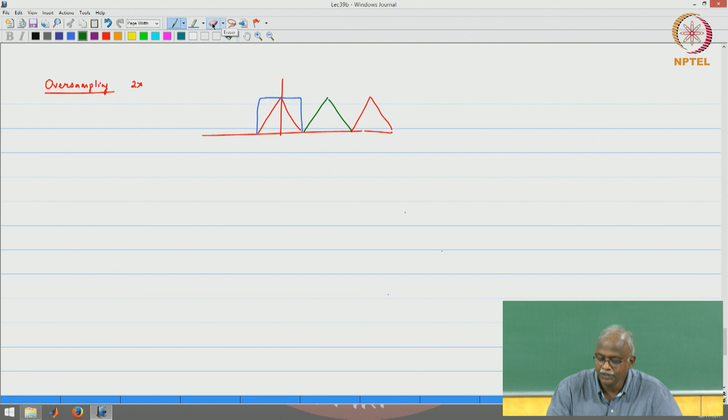But the problem is, if I do this, then my next copy of the spectrum comes right there. I do not have any room to do manipulation on the quantization noise. I am stuck with the quantization, and also with a very restrictive design of the anti-aliasing filter. Now if I say I am going to allow 2x oversampling, that means these are not in the picture. This is not there, this is not there; this is the 2x oversampling. I have now separated it out.

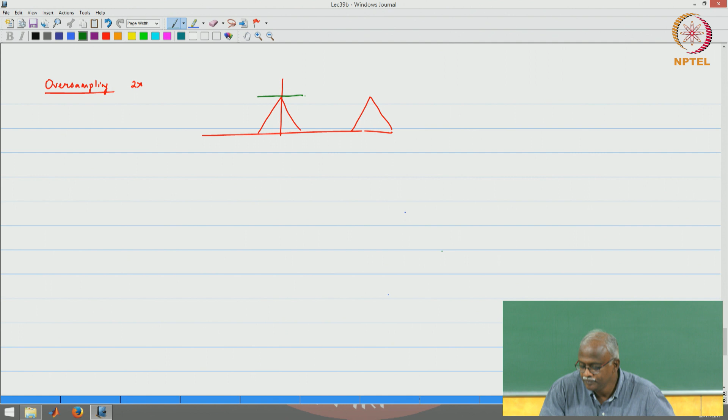So the anti-aliasing filter does not have to be as stringent as before. It could be something like the filters we have designed. You want to keep only the desired portion of the signal spectrum, so keep it flat in this portion and then have a drop off. Okay. Now what will this do for the quantization noise? Quantization noise is going to be generated across the whole range.

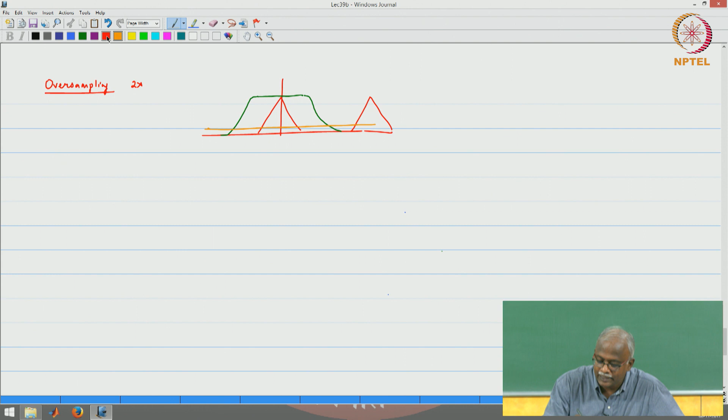So effectively what you will see is that the signal is present here, and there is some effect of quantization noise. There is quantization noise in the desired signal band, and of course outside of it also, because the anti-aliasing filter did not kill all those samples, but you will see some kind of roll off. So the noise is present even outside of the signal spectrum.

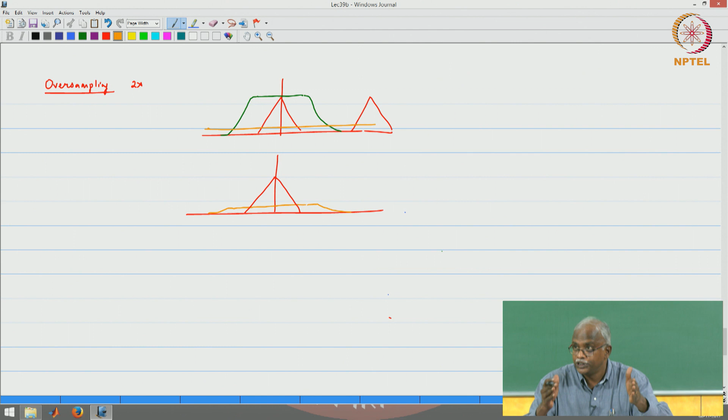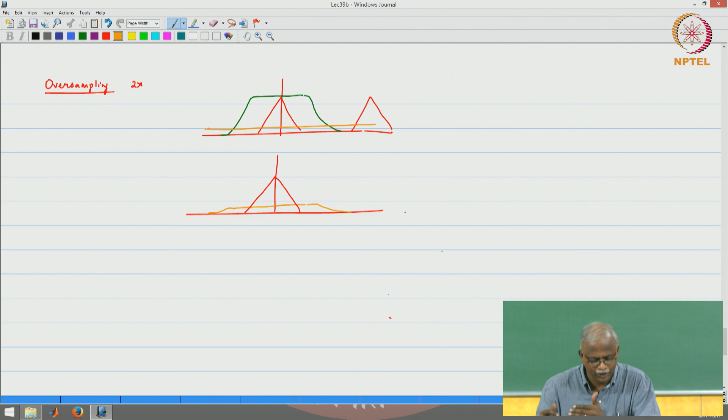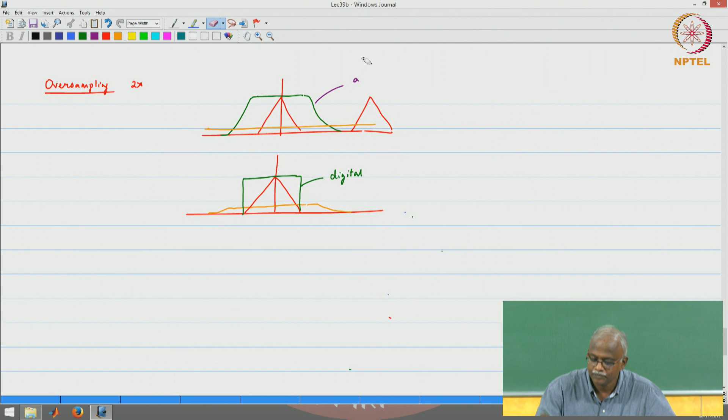Now if I downsample by a factor of 2, which is what you would need to do: I have oversampled by a factor of 2 after the anti-aliasing filtering, so at some point I have to downsample by a factor of 2. Which means I would now apply a digital filter and then downsample by a factor of 2. This would be a digital filter. And this, by the way, is an analog anti-aliasing filter.

Okay. Wait. That's a good question. The desired signal plus some unwanted signal is not necessarily quantization noise, you are correct. I have to be careful with this. What has been allowed by the anti-aliasing filter is some portion of the signal that is outside. I do not know what is outside. I have my desired signal, and there could be something beyond it, outside the bandwidth, and it is that portion. So it should not be orange. It should be something else which is part of the continuous time signal present there.

After quantization, noise will go all the way up to the sampling frequency. I have to downsample and then get rid of it, you are right. So this is actually not orange, it is red. The quantization noise has to be flat; quantization comes after the anti-aliasing filtering. This portion is what has come in. I do not know what is outside my signal band. It may be the adjacent channel or some other extraneous signal, which has come into my system because my anti-aliasing filter is not very tight. But subsequently I will get rid of it.

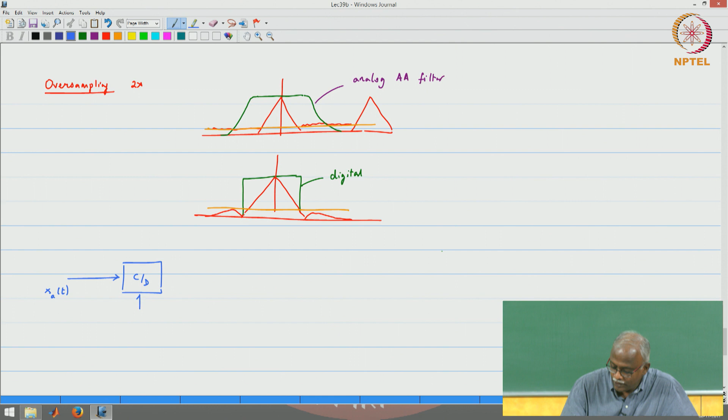So I have an analog signal x_a(t), which is followed by a C to D converter, and this is an oversampled approach. The sampling period, if you were to sort of relate it to, so let me just write it down here.

The sampling must be at least 2 times omega n, where omega n is the Nyquist frequency, the maximum possible frequency. The sampling period is equal to 1 over fs, where fs is equal to omega s by 2 pi. So this becomes 2 pi by omega s, which is nothing but 2 pi by 2 omega n. So this would be pi by omega n. Okay. So Ts, if you want to do Nyquist sampling, would be pi by omega n.

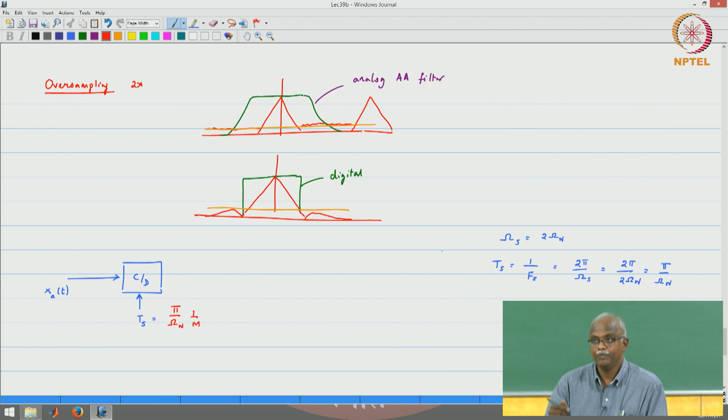So this has been set to pi divided by omega n into 1 over m. That means your sampling period is 1 over m of the Nyquist sampling period, which means that you are oversampling by a factor of m. So this produces for us the signal x of n, which would be passed through the quantizer that would produce for us x of n plus e of n, the signal plus the error signal,

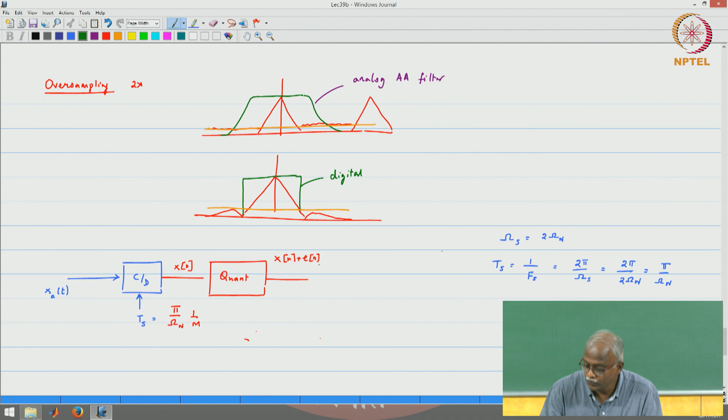after which we will go into the digital domain, where I will pass this through a low pass filter with cutoff omega c equal to pi over m. The reason we are doing that is because we are going to do a downsampling by a factor of m to take care of the oversampling factor, and here comes the final signal, which is the quantized signal.

Okay. Now I will be with you in a minute.

So just for differentiating this quantized signal from the earlier type where we did not do any oversampling, I want to write it with the subscript d. That means it has come through a process of oversampling and down conversion, and x_d(n) can be related to x_da(n), the discrete time signal through this downsampling process, plus x_de(n), the error signal. So this is the signal component, and this is the quantization error component.

Okay. So just some notation. Yeah, there was a question. What is omega n over here? Is it the Nyquist rate or is it the maximum? Okay, good question. Let us clarify that. This would be in the continuous time. Now this is all discrete time here. So if you were to write it in continuous time, this signal, this is omega naught. Okay, and maybe the confusion is coming because of this.

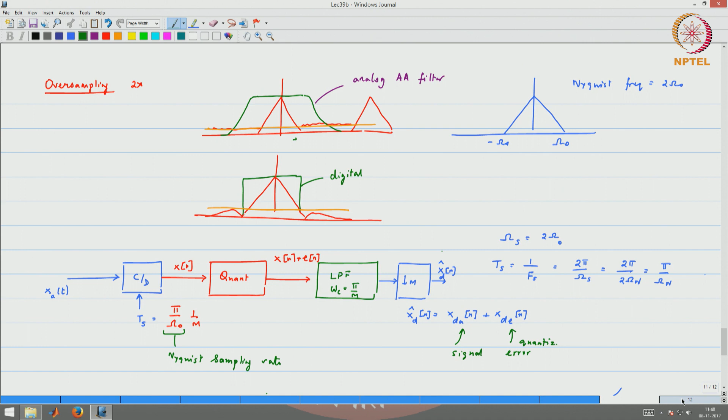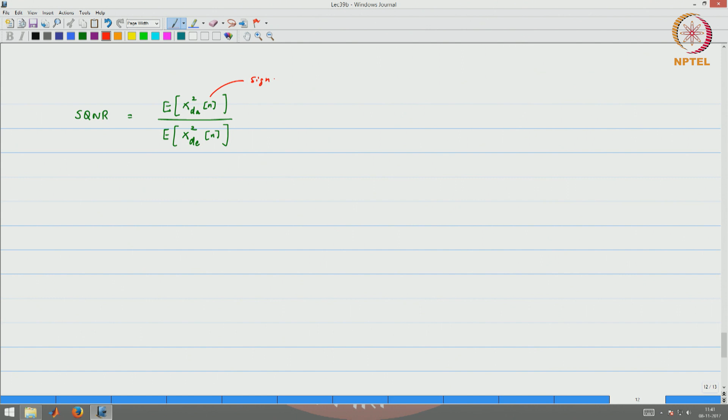So given this form, the signal to quantization noise ratio now becomes SQNR equals the expected value of x_da(n) squared, that is signal power, divided by the expected value of x_de squared of n. So this is the signal part, and this is the quantization error part.

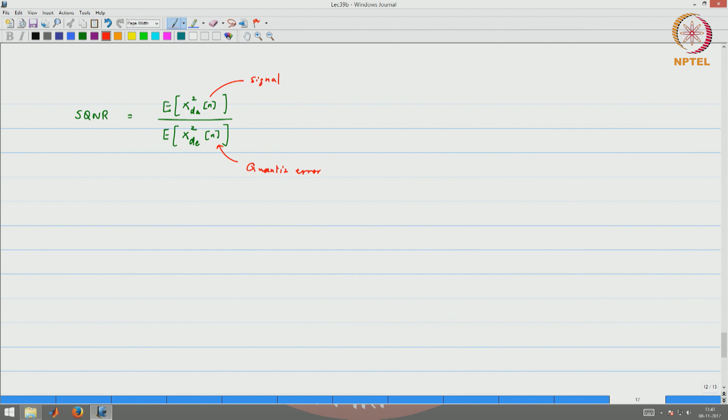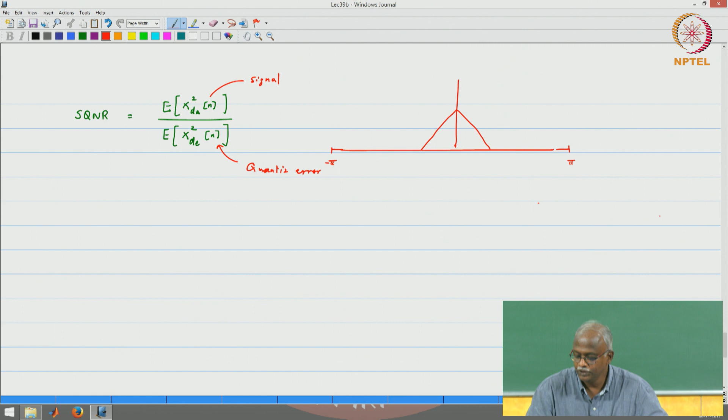So here is where I would need you to visualize the process. The pictorial representation is the following. I have my desired signal, I am going to plot from minus pi to pi, and the reason it is constrained to only a part of the range minus pi to pi is because of the oversampling. Now, this has gone through a quantizer of b plus 1 bits. So the quantization error is uniform in this region.

Now, what does the digital anti-aliasing filter do? It is going to ideally keep a portion of this. Did the combination of the anti-aliasing filter in the analog domain and the anti-aliasing filter in the digital domain do anything to your signal? Your signal went through without any issue, right, no problem at all.

So basically we are leveraging a key concept in the modeling of quantization noise, which is as follows: x of n added with e of n is what produces x hat of n.

So, we have modeled the quantization as a linear perturbation, right, basically some other signal that got added. So, when you now think of it in terms of the filtering it has gone through, yes, x of n and E of n got added, but when you pass it through a linear filter, by linearity it is the same as passing x of n through the filter, then adding E of n passed through the filter. So, effectively no impact on signal.

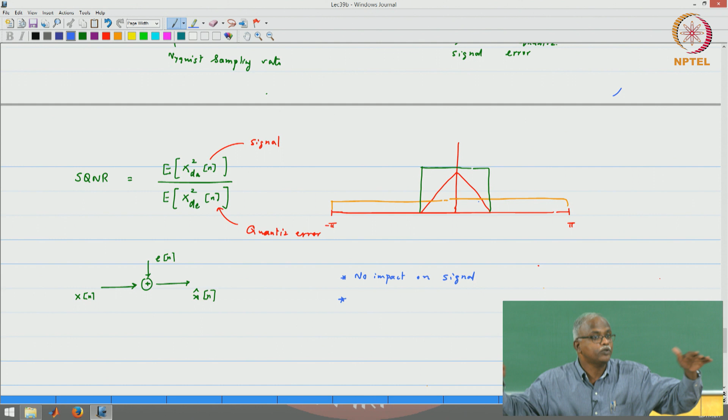Okay. So, though in the context of the previous time when we discussed oversampling, it was only to reduce the complexity of the analog anti-aliasing filter, now you see that it is actually more than that. You can now go through and show the following result.

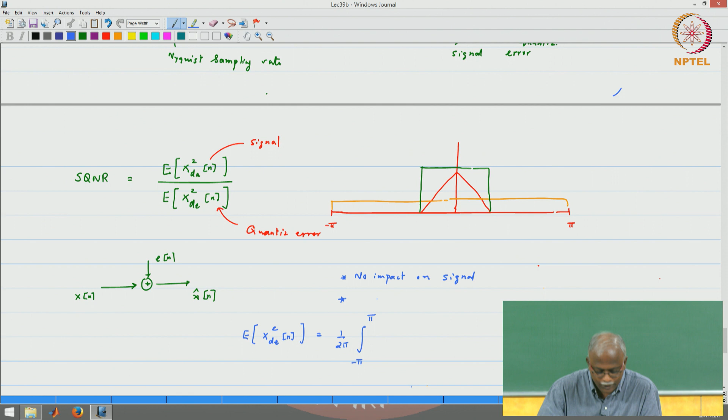So, basically the expected value of x_dE of n squared will be 1 over 2 pi, integral from minus pi over m to pi over m, that is the part that is retained, of sigma e squared d omega. So, if you go through the process, this should come out to be delta squared by 12 times 1 over m, that is 1 over m times sigma e squared.

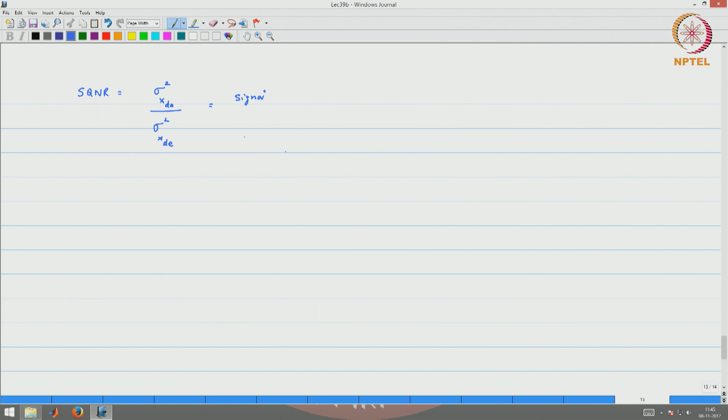Okay. So, this is a huge advantage, because now your signal to quantization noise ratio formula is slightly different. So, let us quickly capture that and take it forward. The SQNR, signal to quantization noise ratio, is basically sigma squared of x_dA, the signal part, divided by sigma squared of x_dE, that is, signal power divided by quantization noise power.

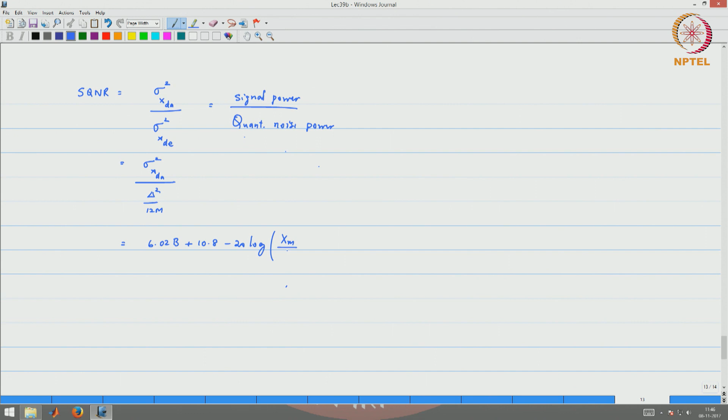Okay. So, one step away from a very important result. This comes out to be sigma x_dA squared divided by delta squared by 12m. If you write it in dB, this will be 6.02 B, the same one that we got, plus 10.8 minus 20 log of X_m by sigma x_dA, plus 10 log base 10 of m, not log base 2. That factor of m has now entered.

Okay. So, by increasing your oversampling rate, you not only reduce the complexity of the anti-aliasing filter, you also benefit in terms of the noise. So, here is a very important element. We have a thumb rule: from before we know it is 6.02 dB, or 6 dB per bit. Now, if you look at 10 log 10 of 4, basically an oversampling factor of 4, what will you get? Around 6 dB.

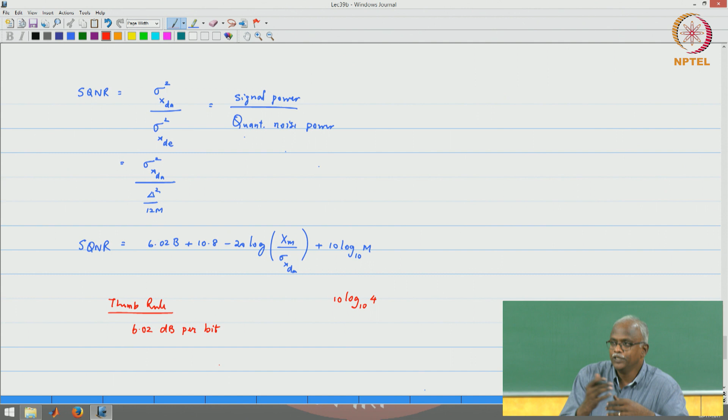So, what I can achieve with 1 additional bit, I can achieve with oversampling by a factor of 4. So, if you already have a 16-bit quantizer and you want 18 bits of precision, it is possible, because you can do your oversampling, 4 times 4, a factor of 16, and you will get the required precision.

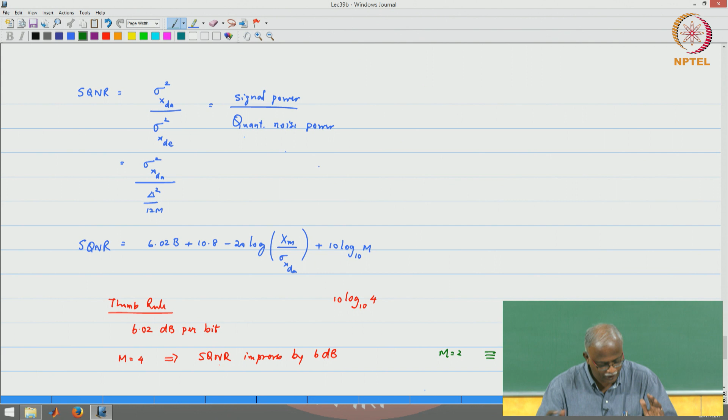So, we can also write the following: m equal to 4 implies the SQNR improves by 6 dB, or equivalently, m equal to 2 is equivalent to a half bit improvement in SQNR. So, you can use that relationship to work out the key results.

Okay. Here comes the most interesting part. This is good enough, we actually achieved it, but keep in mind that if you have an 8 bit quantizer and you want 16 bits of equivalent performance, you will find that m becomes very large, so you will have a lot of complexity. So, here is where the thought process comes in: we look at this figure, and the question it raises is, does the quantization error need to be spectrally flat?

Does the quantization error need to be spectrally flat? Answer is, the way we do quantization today, it is going to be that way, there is nothing we can do about it. So, we then ask, so this is spectrally white. What are we asking? Can we make the quantization noise colored?

Coloration of the noise. Coloration depends on some kind of memory between adjacent samples. Only when you have memory you can introduce coloration. So, basically if each of these samples are independent of each other, we cannot produce that. So, the question is, can you do something in terms of the coloration?

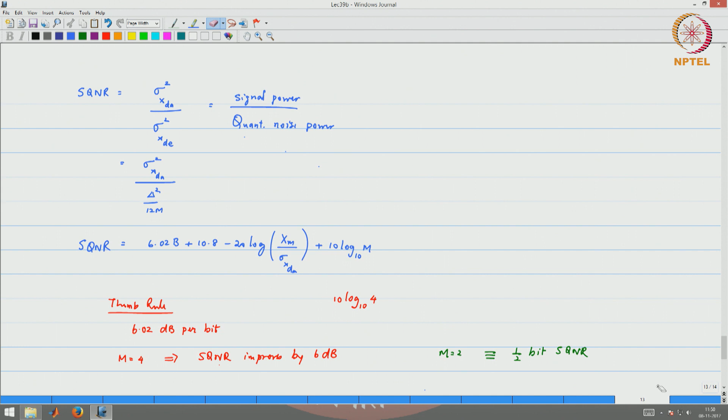And here is the simplest of the structures that introduces coloration, and let me sketch it for you, leave it for you to do a little bit of analysis. We will pick it up from here, and then in the first part of tomorrow's lecture we will conclude this discussion. So, here is a modified quantizer. I have the analog signal XA of t. This is going to be the C to D type of quantizer.

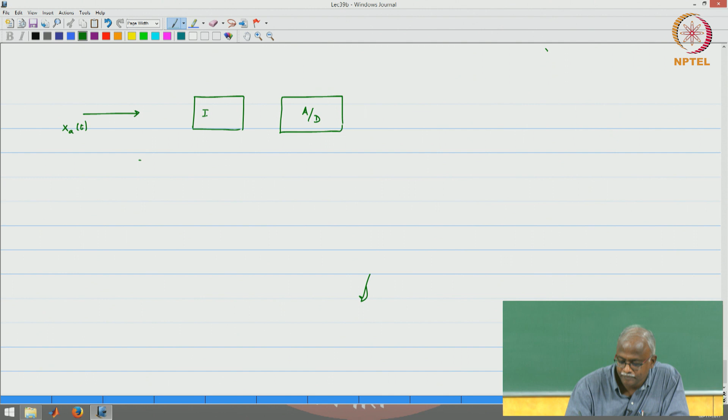So, I am going to precede the quantizer. So, basically we will think of it as, instead of C to D, as an A to D converter. So, basically it is a finite number of bits conversion apart, but I am going to precede it with an integrator. Okay, I am going to precede it with an integrator. So, what is an integrator? An integrator is one that adds all of the past samples, right. So, can you write for me the impulse response of an integrator?

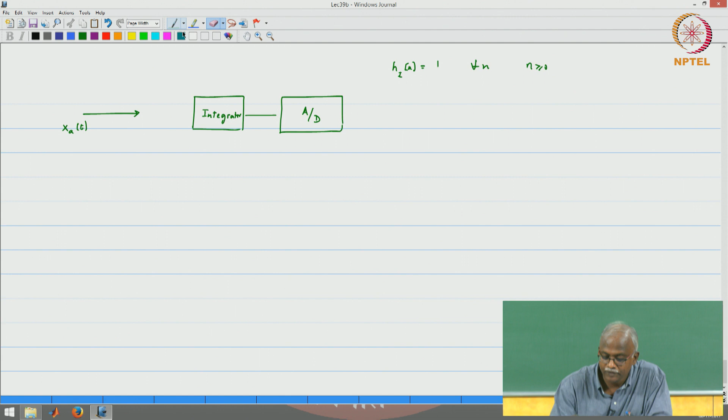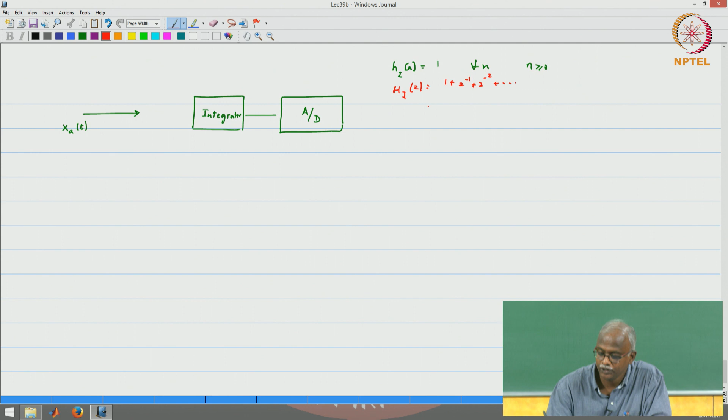Hi of n is equal to 1 for all values of n, starting from n greater than or equal to 0, right. So, basically that is a causal integrator. So, if I were to ask you the filter response of this, Hi of z, integrator Hi of z is 1 plus z inverse plus z minus 2 dot dot dot, this is 1 over 1 minus z inverse. Is it stable? No, it has got a pole on the unit circle. So, it is not a stable system. So, a discrete time integrator is not a stable system.

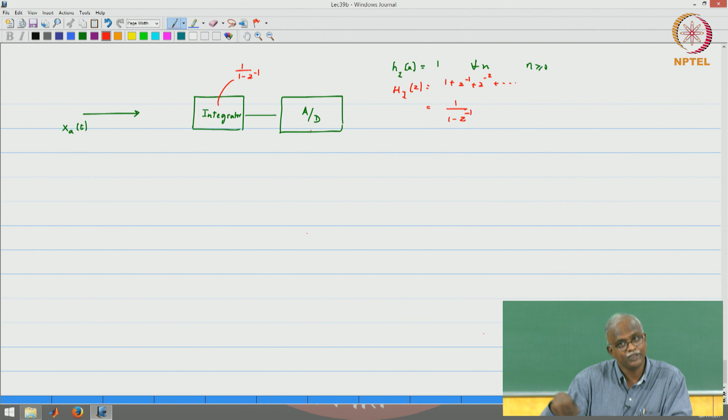However, if you were to control the stability part, so think of this as a 1 over 1 minus z inverse. Okay. If you need to cancel out the effect of the integrator, you must differentiate first. So, how do I differentiate first? So, I take this signal and subtract it from the difference. So, basically with a minus sign, with a minus 1.

Okay. So, if I oversample my signal, two successive samples will look almost the same, right. So, if I subtract out the previous sample, it looks like I am making a small step differentiation, x of n minus x of n minus 1. Then I pass that through an integrator and then quantize it. Now, you may say, well, really does this make any difference? You differentiate it and then you are cancelling it.

So, look at the following aspect. So, if that is 1 over 1 minus z inverse, think of this as a z inverse, treat this as a point where the error signal comes in. Okay. So, the equivalent diagram that I want you to look at is the following: XA of t followed by a C to D, which is a perfect quantizer, no quantization error, and then an additions part. So, this is a discrete time equivalent of what we have drawn there. The integrator is 1 over 1 minus z inverse followed by the quantizer.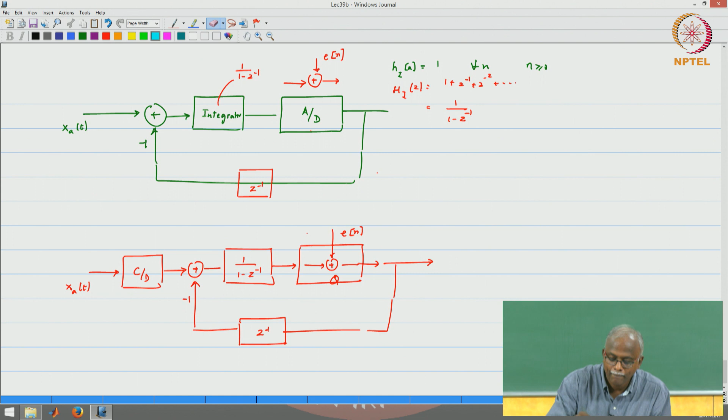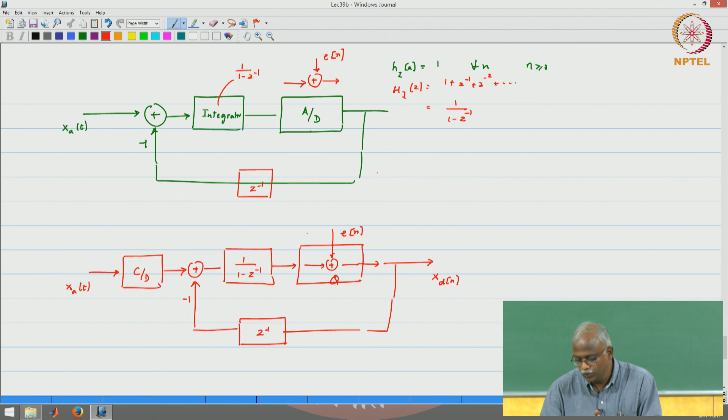So basically what I want you to do is, if the output signal is x d of n, think of it as two inputs, one is the signal, the other one is the error. I want to look at the transfer function for the signal part and the error part, and then we will take it forward from there. But the key thing to note is that this is an attempt to color the noise. If I cannot do anything to the energy of the noise, the total power will remain the same.

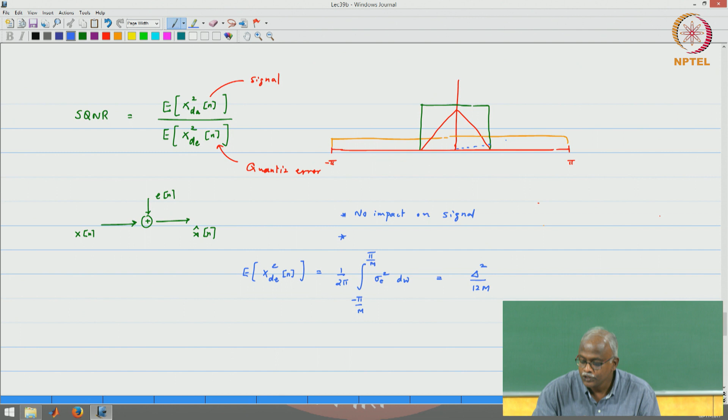So if I can redistribute the noise in the quantization, then actually when I do the digital filtering, I can throw out more than what I could do before. So that half bit improvement can now become 1 bit improvement, 2 bit improvement, 3 bit improvement, depends on how you have shaped the noise.

Okay. So I will just show you the noise shaping part, but basically it is a very interesting mechanism where you start thinking, saying I do not want flat, so I must introduce some sort of memory between the successive samples. How do I do that? That is what we are going to be looking at tomorrow. And all this is possible because you have the flexibility of the sampling rate.